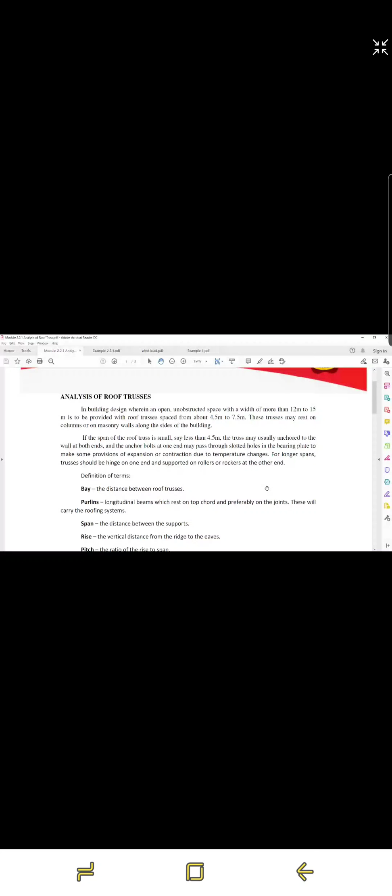Then purlins, that is longitudinal beams which rest on top chord and preferably on the joints. This will carry the roofing system. Then we have the span, that is the distance between the supports. Then we have rise, the vertical distance from the ridge to the eaves. Then we have pitch, the ratio of the rise to span.

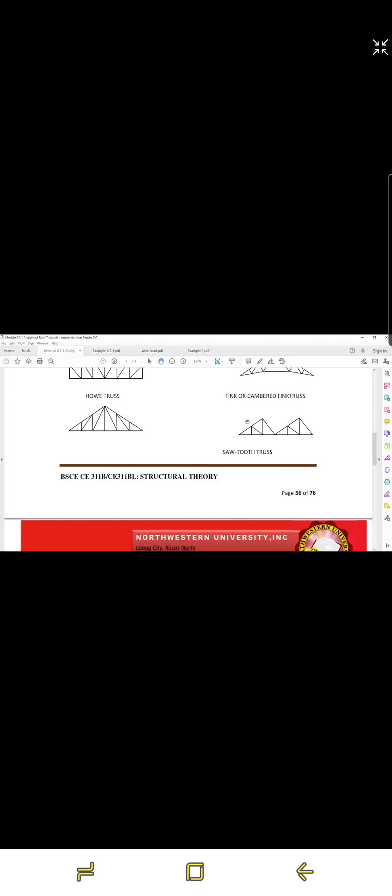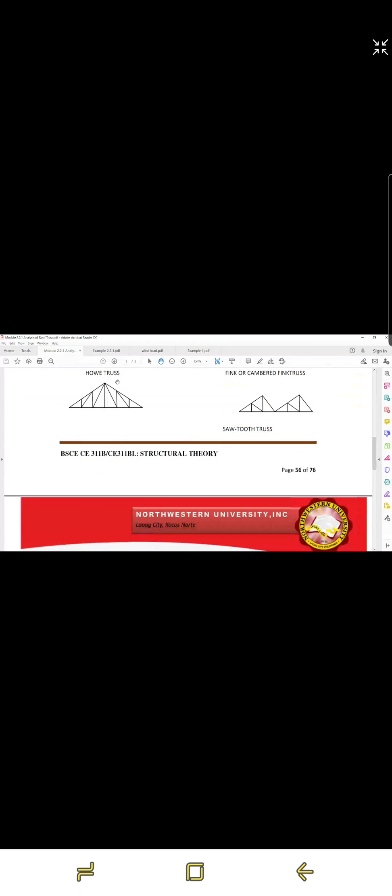So we have here the different typical types of trusses. We have Howe truss. So this is the Howe truss. Then we have Fink or cambered truss. Then we have sawtooth truss. This is the sawtooth. And the other one is Pratt truss. This is the Pratt truss, and the other one, this one. Then we have Warren truss. So this is a Warren truss. And the other one is scissors truss.

So the loadings, we have dead load. So weight of roof cover, rafters, and purlins, that is from 0.24 kilopascal to 1.2 kilopascal. Then we have weight of bracings, bracing system, so 0.024 kilopascal to 0.072 kilopascal. Then we have weight of ceiling and other suspended loads. That is from 0.4 kilopascal to 0.5 kilopascal.

So the dead weight may vary depending on the type of materials to be used. NSCP or other building material books give the different dead load of every type of materials. So those are the different dead loads. But they can vary based on NSCP because what I gave is incomplete. For the most complete materials, we have the NSCP. So NSCP is our basis.

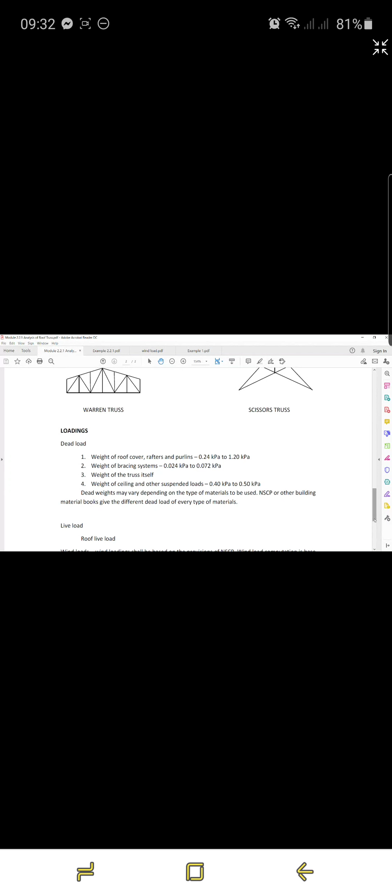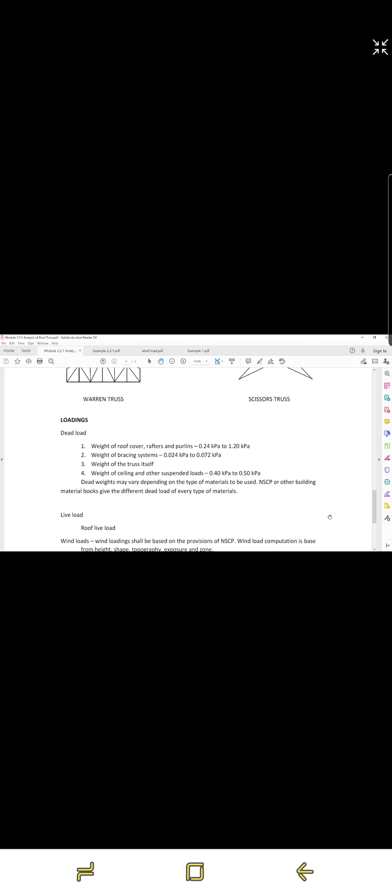Then we have the roof live load. Roof live load depends on the slope of the truss and the effective area of the roof. Then we have wind loads. Wind loads shall be based on the provisions of NSCP. Wind load computation is based on height, shape, topography, exposure, and zone. So these are what we need to determine.

So weight of truss. The weight of the truss can be estimated by use of an approximate empirical formula. It shall be noted that any empirical formula should be used with discretion or with adapting modification. Or we can also determine the weight of the truss based on the total length of the truss. If we have the cross-section of the truss and we know the unit weight of the material, we can compute the weight of the truss.

So the weight of the truss from H.S. Jacoby for wooden truss: W = 0.024 + 0.012L, where W is the weight of truss in kilopascal and L is span in meters. For steel truss, based on C.E. Fowler, W = 0.019 + 0.006L. So this is the empirical formula for the weight of steel truss.

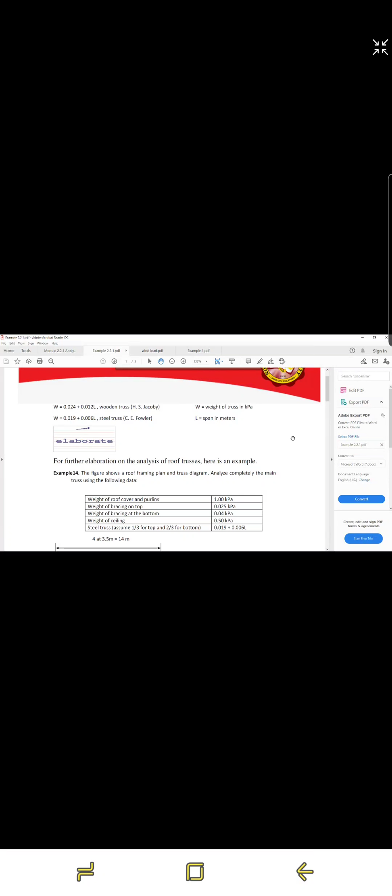Okay, so let's have here an example of the analysis of roof truss. We have here the roof framing plan. That's why I had you make a roof framing plan, in which we will analyze the dead load, the live load, and the wind load. So this is our roof framing plan. We have here the truss. The spacing of the truss is 3.5 meters. So 3.5, 3.5, 3.5, and 3.5.

So the span of the truss is 9 meters. Then we will neglect the effect of the eaves. So these are our eaves. Neglect effect of eaves if support is not at the end of the eaves. So if our support is not at the end of the eaves, we neglect the effect here.

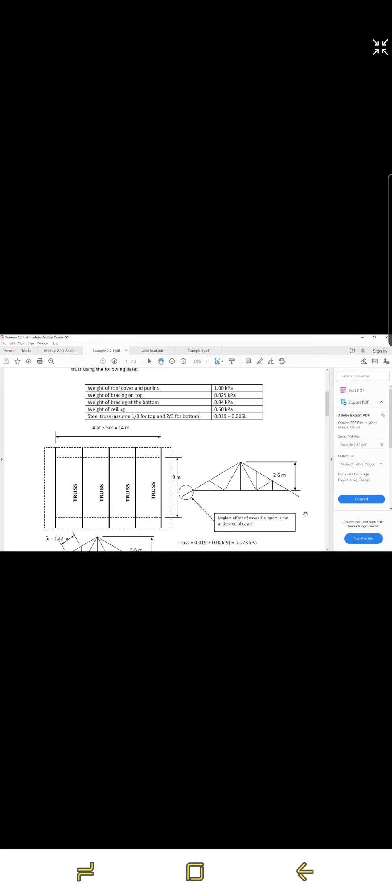Okay, so the figure shows roofing plan and truss diagram. So ito naman yung truss diagram natin. Our truss diagram is 2.6 in height. Then the span is 9 meters. Ito yung 9 meters.

So weight of roof cover and purlins, 1 kilopascal. Okay, so ito ibinigay yung mga weight. But for your plate, kailangan yung i-identify yung material. So yung material, you will base that on the NSCP. So meron naman kayong na-download na e-book sa NSCP, yung pinakita noon ni Mr. Shason. So you can use that one.

Then we have the weight of bracing on top, 0.025 kilopascal. Weight of bracing at the bottom, 0.04 kilopascal. Weight of ceiling, 0.5 kilopascal. Then this is steel truss. So assuming 1/3 of the top chord and 2/3 of the bottom chord will be on the distribution of the weight of the truss.

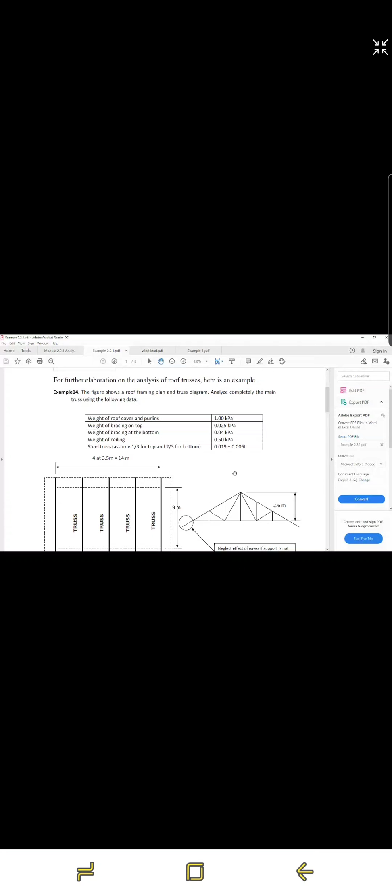Okay, so we have here the spacing at the bottom. Ang spacing ng bottom is 1.5 meters. So 1.5 plus 1.5, 3. 3 plus 3, 6 plus 3, 9. Kaya 9 meters ito.

So the truss, from the formula, the weight of the truss is 0.019 plus 0.006 L. So we have here 0.019 plus 0.006 times L. The span of the truss is 9 meters. So times 9. So we have 0.073 kilopascal.

So yung weight ng truss, it should be in kilonewton. So kilopascal, that is pressure. So we multiply that by the area. So the area there is 3.5. Itong spacing ng truss, 3.5 multiplied by 9. So we have 0.073 multiplied by 3.5 times 9. So we have 2.3 kilonewton. So 2.3 kilonewton, that is the weight of the truss.

So yung isang truss lang. So yung isang truss lang ang i-analyze natin and it will be the same all throughout the trusses. So we have the weight of the truss is 2.3 kilonewton.

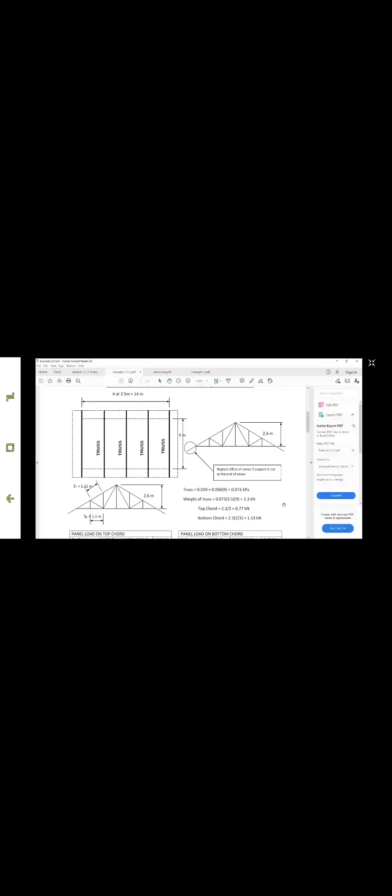So for top chord, okay, sinabi dito na assume 1/3 for top chord and 2/3 for bottom chord. So for top chord, that is 2.3 divided by 3, so we have 0.77. Then for bottom chord, 2.3 multiplied by 2/3, so we have 1.53 kilonewton. So the weight of the bottom chord is 1.53 and the weight of the top chord is 0.77.

Okay, so we have panel load on top chord. Okay, so we have the roofing. So ito yung top chord natin. The weight of the roofing will be carried by the top chord. So we have 1 kilopascal, that is the weight of the roofing. So multiplied by the tributary area. Ang tributary area natin is 3.5 dito multiplied by 1.32. So we have 1 times 1.32 times 3.5. So we have 4.62.

Then we have bracing on top. So 0.025 multiplied by 1.32 multiplied by 3.5. So we have 0.12 kilonewton.

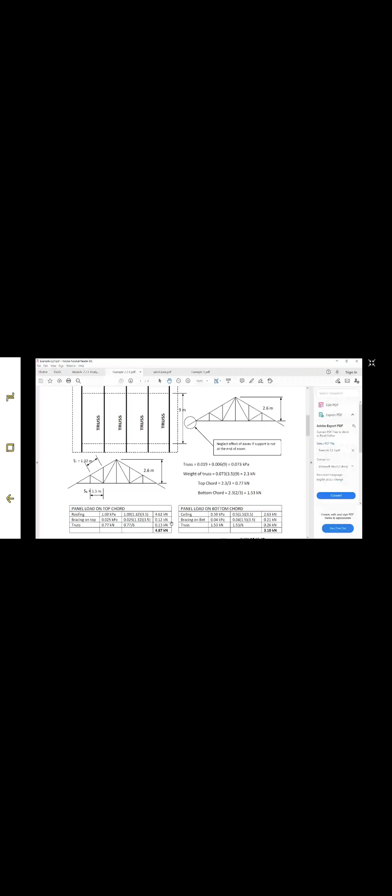So yung weight ng top chord, that will be divided by 6. Kaya we have 0.77 divided by 6, and we have 0.13 kilonewton. So the panel load on top chord will be 4.87 kilonewton. So ito ngayon yung ilalagay natin na force sa joint on top chord.

Then panel load on bottom chord, the weight of the ceiling is 0.5 kilopascal. So we multiply that by the tributary area. Tributary area is 1.5 by 3.5. So we have 0.5 times 1.5 times 3.5. So we have 2.63 kilonewton.

Bracing on bottom chord. So bracing on bottom chord, we have 0.04 kilopascal. So multiplied by 1.5 times 3.5. Then we have 0.21 kilonewton.

Then for the truss, so the bottom chord is 2/3. Then 2/3 of 2.3, that is 1.53. So we count the number of joints on the bottom chord. So we have 1, 2, 3, 4, 5, 1/2, that is 6. So we have 1.53 divided by 6, and that is 0.26 kilonewton. So the panel load on bottom chord will be 3.10 kilonewton.

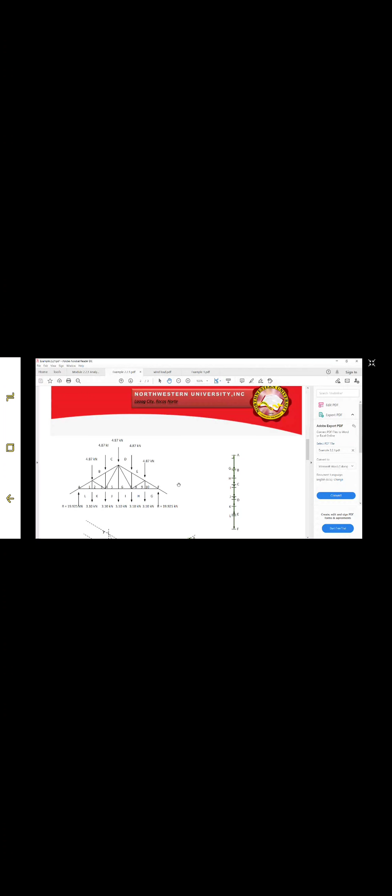Then we have here 3.1, 3.1, 3.1, 3.1, and 3.1. So if we have to get the reaction, the reaction will be 19.925 kilonewton. So that is symmetrical. I-add lang natin yung top chord at saka bottom chord, the total weight on the top chord and total weight on the bottom chord, divide that by 2, so we have 19.925 kilonewton.

Then we designate vector force AB. So ito yung AB. Then BC ito. We have CD, DE, EF. So this is FG. The reaction here is FG. Then we have GH, HI, IJ, JK, KL, and the reaction here is LA. So we construct the force polygon for the reactions or the forces.

Okay, so we have here AB. Ito yung AB. So i-measure natin yung AB by using the scale. So yung scale natin, dapat consistent tayo sa scale. So we have AB, then BC, CD, DE, and EF. So ito yung EF. Then we have the reaction 19.925, that is FG. So yun yung FG. Then we have GH, HI, IJ, JK, KL, and LA. So yan yung LA.

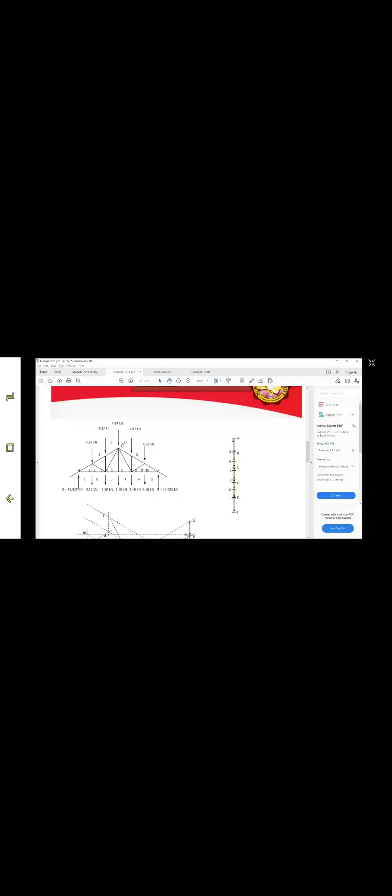Kaya ito siya ngayon. So we have A, B, and C. That is the inclined line, so nakaparallel sa top chord. Then at F, E, at saka D, it is also a line which is parallel to the top chord. So naka-parallel siya. Then we will locate point 1. So point 1 is between L1 and A1. So yung A1, ito, L1, ito yan. So that is point 1.

Then we have point 2. Point 2 is located between 1-2 and K2. So 1-2 is vertical, K2 is horizontal. So ito siya. That is point 2. Then point 3 is in between 2-3 and B3. So yung 2-3, we have this one. Then ito naman yung B3. So the point of intersection will be point 3. Then point 4, located between 3-4 and C4. So 3-4 is vertical, ito yan. And C4 is inclined. Ito yung C4. So we have here point 4.

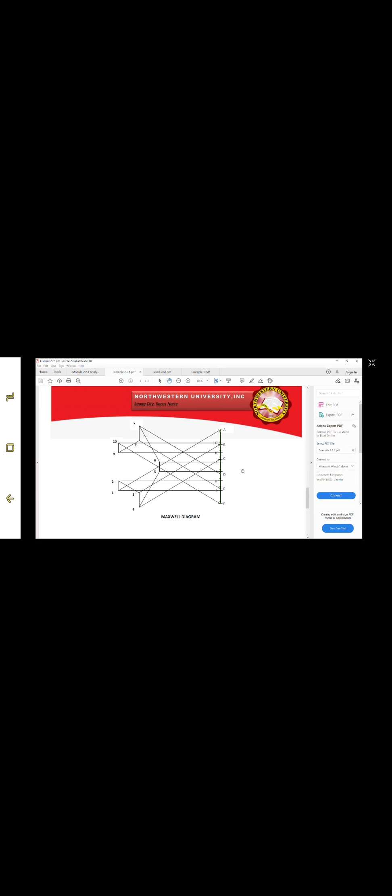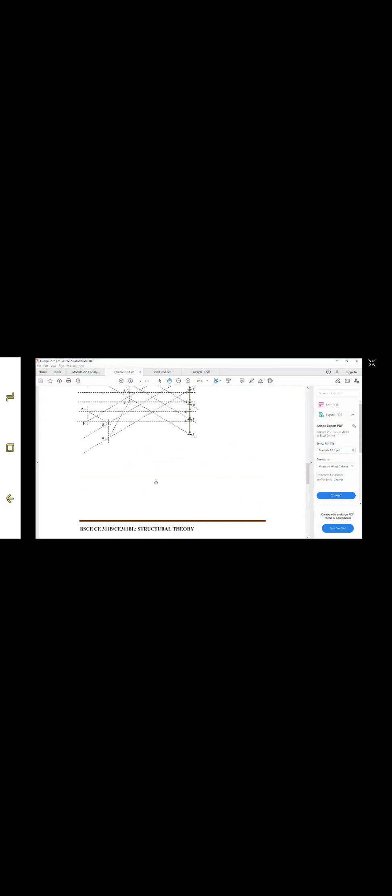Okay, so ito na ngayon yung result natin. So we have now applied the scale. So we have 34.6 kilonewton L1, K2 34.6 kilonewton. So we have here K2, yan yung K2. 1, 2, L1, so yan yung designation natin dito.

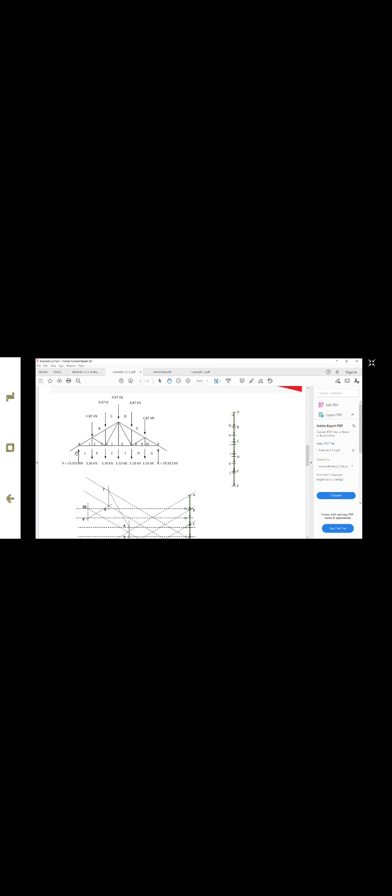But if we have to determine the type of the force, if that is in tension or in compression, halimbawa, dito sa joint A. Joint A is intersected by three members with the reaction. So yung reaction, A1 at saka L1. So to determine the type of the force, we start at the reaction, then it follows by A1 at saka 1L.

Okay, so yung reaction natin is LA. Ito yung L, ito yung A. So LA is upward. Tama yung direction natin, upward yung reaction. So LA is upward, then followed by A1, then 1L. A1 is compression. So yung direction ng A1 will be down to the left.

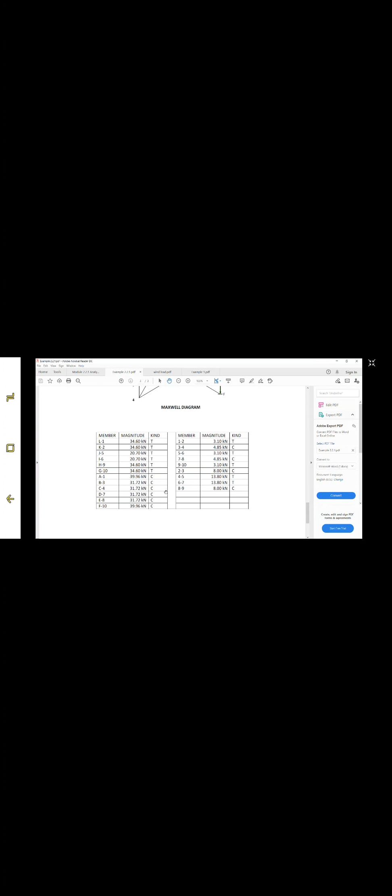Compression. So LA, then A1, then 1L. So yung 1L naman, that is towards the right. So that is how to determine if the force is tension or compression. So therefore, A1 is compression, L1 is tension. So ganun lang ang pagdetermine ng force by using the Maxwell diagram.

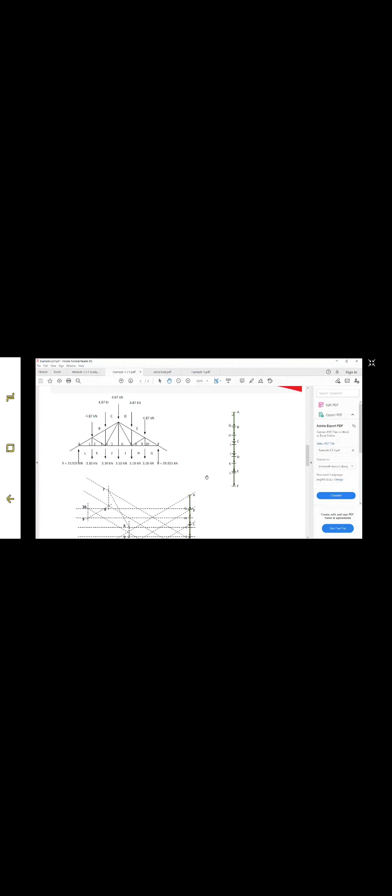Halimbawa naman, dito tayo sa joint between 5 and 6. Then we have a force of 3.1 kilonewton that is downward. So ang pagkuha ng diagram is pa-clockwise tayo. We start at IJ. IJ is downward, followed by J5, then 5-6, then 6I. JI is downward.

IJ, downward. Then followed by J5, agpa-left, that is tension. Then 5-6, agpangato, that is also tension. Then 6I, that is to the right. So JI nagpababa, J5 nagpakanigid, 5-6 nagpangato, then 6I nagpakanawan. So all the forces acting on these members will be subjected to tension.

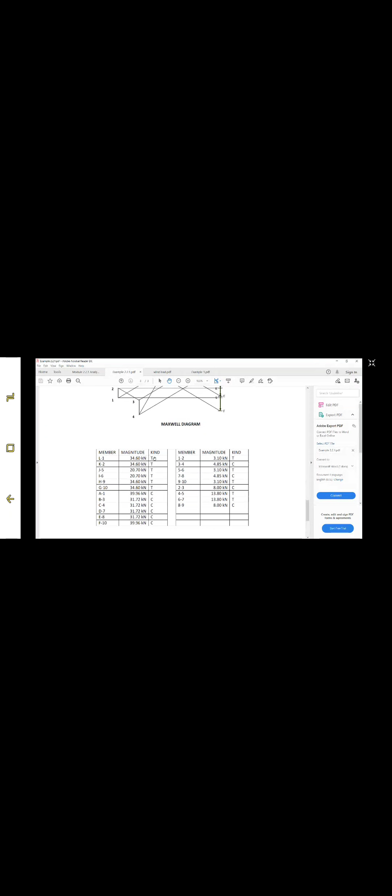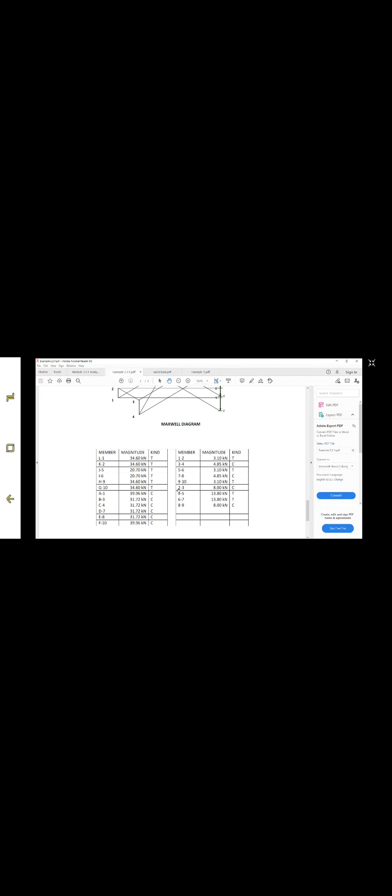Okay, ito yung Maxwell diagram. So we have now the different members L1, K2, J5, I6, H9, G10, A1, B3, C4, D7, E8, and F10. Then we have 1-2, 3-4, 5-6, 7-8, 9-10. Then 2-3, 4-5, 6-7, and 8-9.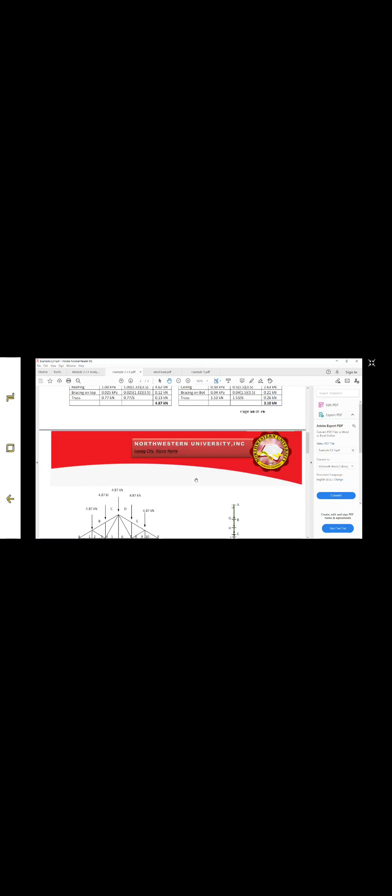Okay, so this is now the result of the dead load. For the live load, ganun din yung pagkuha natin ng mga panel load at top chord. So for the top chord, that will be the roof live load multiplied by 1.32, multiplied by 3.5.

So for roof live load, wala tayong load dito sa ceiling. Only the top chord will be loaded, so there will be no load on the ceiling. So ganun din yung gagawin natin. We have to analyze that by using the Maxwell diagram.

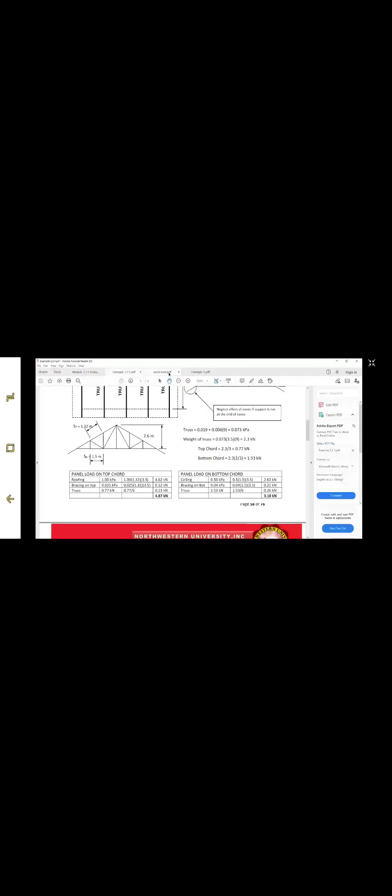Then for the wind load, this is based on the 2010 NSCP. Every building or structure and every portion thereof shall be designed and constructed to resist the wind effects determined in accordance with NSCP. So the design wind pressure P in kilopascal: P is equal to qh multiplied by GCpf.

Pag meron tayong quantity dito na GCpf, isa lang yung term doon. Then minus GCpi, one term lang din. That is for the low-rise building. Then for buildings of all heights, P is equal to qGCp. Wala tayong quantity dito, so meron tayong value ng q, G, and Cp. Then dito naman, qh times GCpi, so dalawa yung term: qh and GCpi.

Okay, take note on the velocity pressure. qz is equal to 47.3 times 10 raised to negative 6 multiplied by Kz, Kzt, V squared, and Iw. So, ano yung wala dito sa diniscuss natin noon na pagkuha ng velocity pressure? Ano ang wala dito?